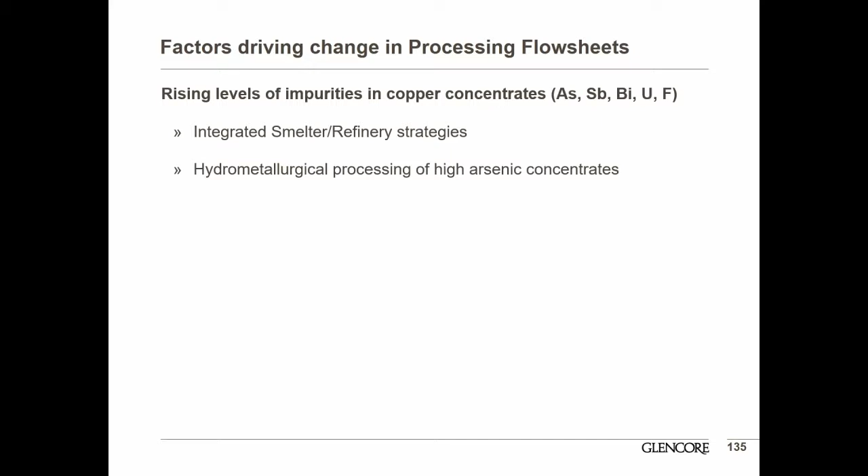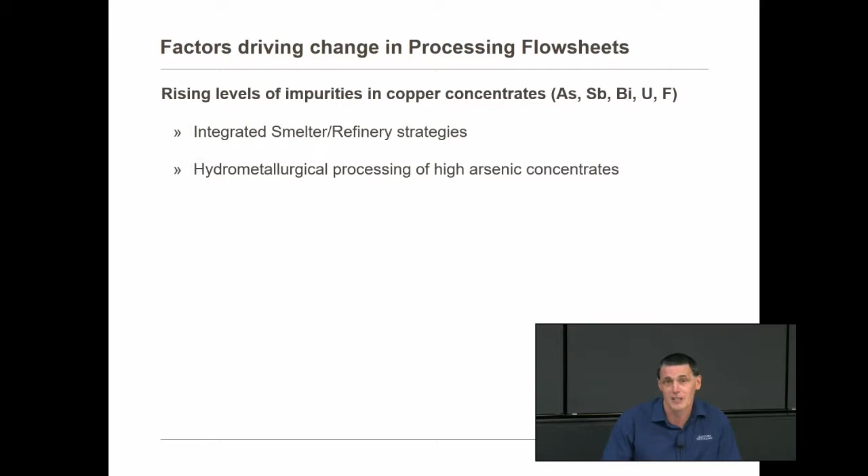I'd like to talk about three different changes tonight that are driving change in our industry. The first is the rising level of impurities in copper concentrates. Arsenic has been an issue for about 10 years now, and we're increasingly seeing issues with antimony, bismuth, fluorine and uranium. Within Glencore and within GT, we're developing a range of products that look at a better integrated smelter and refinery to deal with impurities at the best point in the flow sheet. We've also been developing, over the last 10 years, some exciting hydrometallurgical techniques to deal with some impure concentrates. Paul Boyd spoke about some of those earlier, so I'll just touch on those as well.

The second thing we'll talk about, closely aligned to the first issue, is ongoing global tightening of emission standards. One thing we've seen over the last 10 or 15 years, particularly in countries like China and India, is significant urbanisation and large population growth around what were once isolated processing plants and smelters. That's putting a lot more pressure on the smelting and mining industry in general to reduce emissions. Zero discharge sites are really the best practice these days, and I'd like to talk specifically about SO2 and some of the things we're doing with our technology suite to help reduce SO2 emissions.

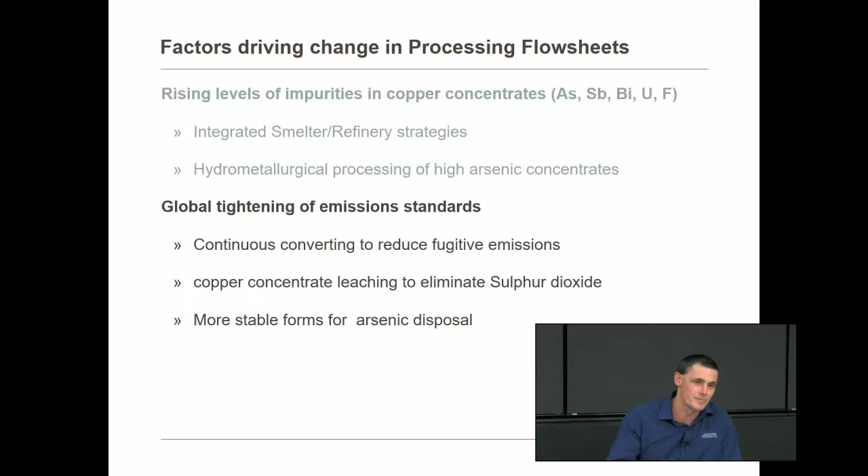The last thing I'll touch on is the global growth of electric vehicles. This has been with us for about 10 or 15 years, but with the significant spikes we've seen in fuel prices in the last 10 years, and also with the drive for decarbonisation across our industries, we think this is something at a clear tipping point, and it's going to have a significant impact on copper and cobalt demand globally going forward.

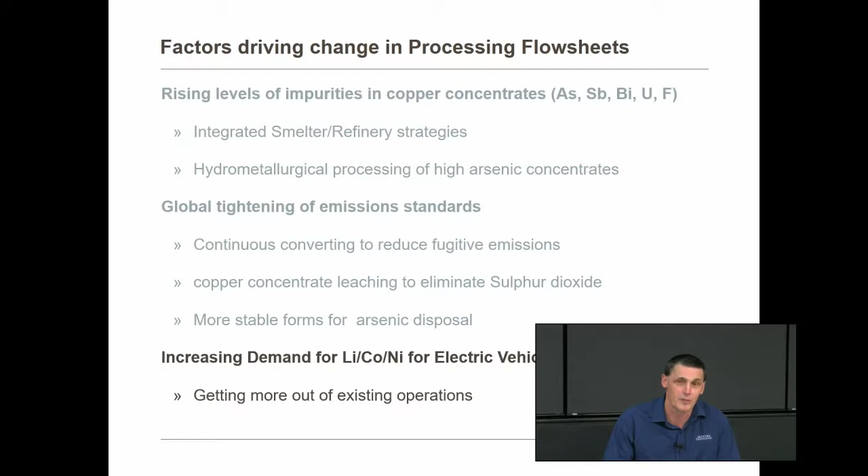So firstly, I'd like to go through rising impurity levels in a bit more detail. We started to see arsenic levels in copper concentrates increase through the 1990s, but at a very slow pace. But around 2004, when the mining boom started in earnest, a lot of very complex ore bodies were brought to market. Between 2004 and around 2007-2008, we saw an increase in arsenic. From 2014 on, that rate of change has increased significantly, and now there's a considerable amount of arsenic produced annually in the world's copper concentrates.

I've got some examples on the screen there. You can see some of the very high levels on recent projects. Ministro Hales in Chile, where they've got a roaster as a solution, has 4% arsenic in that concentrate, which is unsaleable to a smelter. And some of the other examples there, Chuquicamata, one of the world's largest mines, is producing a lot of arsenic in copper concentrate.

Traditionally we've been able to blend that, but the capacity to blend with clean concentrates is really restricted in the market at the moment, and that's a problem that will only get worse going forward. Currently we have 30% of the world's copper concentrates with arsenic levels too high for most of the world's smelters.

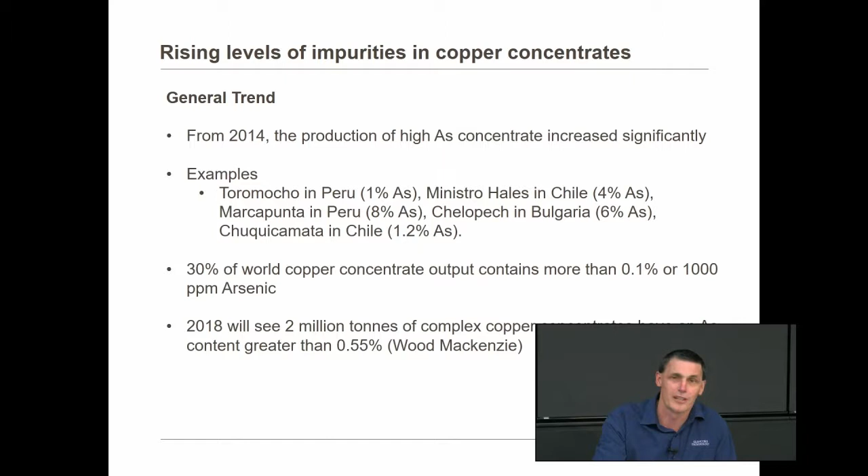Another trend we've seen over the last 10 years is the shutdown of some smelters, such as La Oroya in Peru, that had been able to treat those higher arsenic materials. So we get two trends: the capacity of older and more remote smelters to treat these concentrates is significantly reducing, while arsenic levels are increasing at the same time. Our belief is that we're at a tipping point now where we need significant infrastructure change within our smelter refinery network globally to treat these impurities. That's something we're doing a lot of work on within Glencore Technology to make sure we can meet that demand. The next slide shows the acceleration of arsenic levels in copper concentrates.

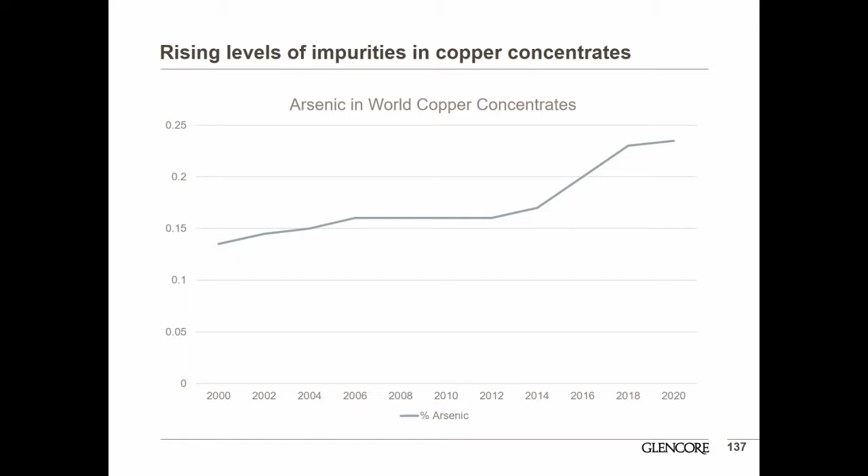You can see the pickup there, particularly in 2012, where a lot of complex projects came on board, and that's continued to accelerate through 2018. The prediction to 2020 is a slight levelling, and again we're starting to see predictions now of a further increase from 2024 onwards. So that's something that's creating a significant challenge for the global industry.

There are many ways that we can deal with this. When we look at the impacts on flow sheets, the first place you would deal with it is in the concentrator, but unfortunately most of the minerals that are bringing high arsenic into our concentrates are things like enargite and tennantite. As far as a concentrator is concerned, these minerals behave very similar to chalcopyrite and chalcocite. They respond the same to the current range of mining chemicals and collectors, and it's very, very difficult to get any kind of separation in a concentrator.

While we have made great strides over the last 20 years with things like the IsaMill, where we can get a significant degree of liberation now, we still don't have the flotation technology and the flotation chemistry to be able to get a clear separation. So unfortunately for the near term, for the next 5 to 7 years at least, a lot of this arsenic will report through to the copper concentrate.

As I said, historically we had been able to blend. There was a significant amount of clean concentrate around in the world. That amount of concentrate is reducing every year as the arsenic levels rise, and so blending is no longer a solution, and we need to start to look to change the infrastructure.

One of the other problems that we've seen is that because we can't take the arsenic out of the concentrate, we have to export it to a smelter, and the smelters are increasingly in urban environments. So what we're doing is we're actually bringing the arsenic problem from a remote mine site, where it may be better contained, to an urban centre where emissions have a much more magnified effect.

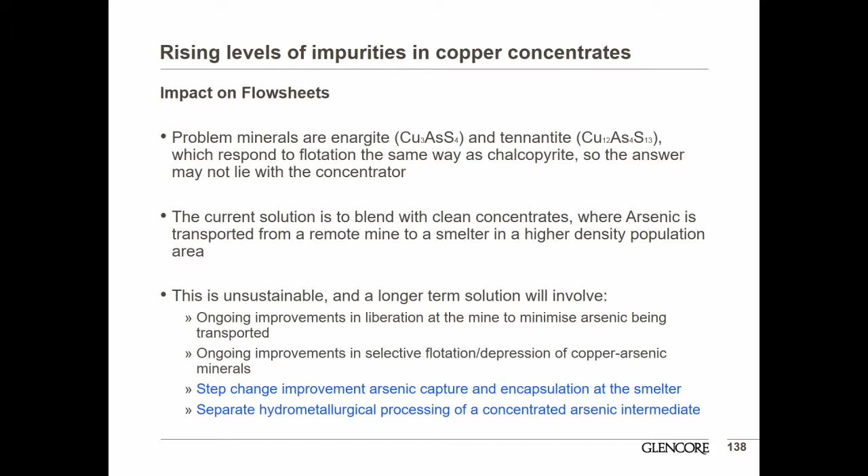So what we're looking to see in the near term then is a step change in the way that we deal with arsenic in our smelter and refinery complexes, and I'd like to touch on that in the next slide with some of the innovations that we're developing within the Glencore Technology Group and within the greater Glencore operations.

One of the things we've focused a lot on in Glencore and in Glencore Technology over the last 10 years is treating arsenic in smelter dust leaching plants. Within the Glencore operations we have 5 plants. Within our own Mount Isa operations here we commissioned a plant in 2004, and that's now had 14 years of operations. These plants are all unique because the dusts that are produced are all unique.

Glencore has a range of smelters that they operate. We operate a flash smelter in the Philippines, we operate an Isasmelt at Mount Isa. We get very different dusts out of both smelters, and so we have a range of flow sheets that we have developed to deal with a range of impurities. We have the ability to custom a solution to a different concentrate blend, and that's something that we get through our unique blend of operations and technology sales.

Our belief is that the world's best practice for arsenic fixation is vitrification in slags, and that's something that we're developing at the moment in conjunction with some of our partners within Glencore, and it's a technology we'll be looking to offer globally in the very near term. The traditional practice of fixing is as ferric arsenate. While it was world's best practice 5 or 6 years ago, increasingly globally it's not an acceptable disposal method anymore, and so we need to look at something that is a lot more stable and a lot more sustainable.

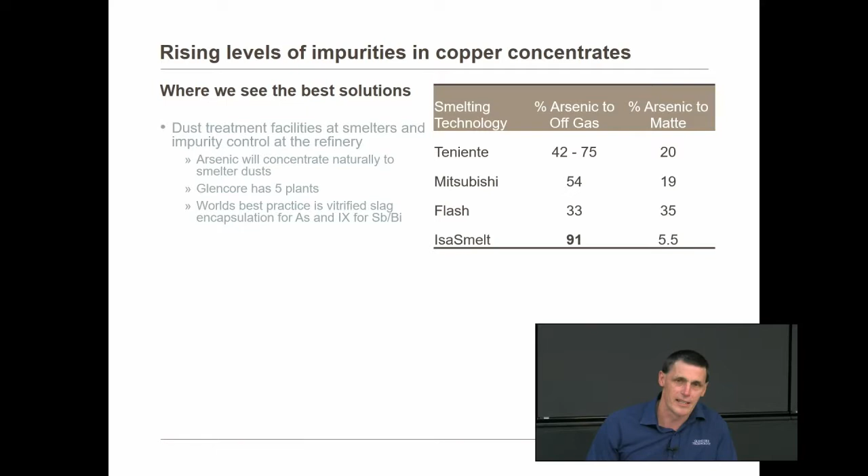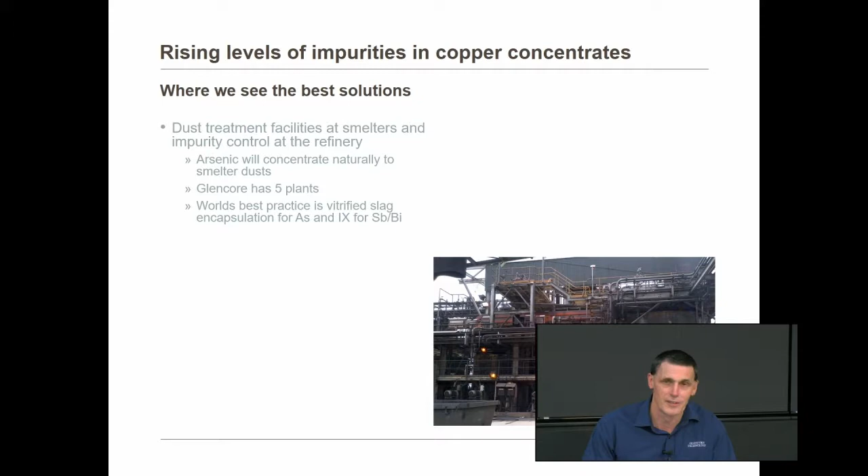We use acid from the weak acid effluent from the acid plant, which also contains arsenic. We use that to leach the dust, and then we fix the dust in that plant there as a ferric arsenate using lime and limestone precipitation. One of the unique things about the flow sheet at Mount Isa is we recover the copper through a metathesis reaction, where we cement it back onto the copper concentrate and feed it back to the smelter. So that's a very, very low cost way of recycling copper to the smelter, and a very effective bleed of arsenic from the dust stream.

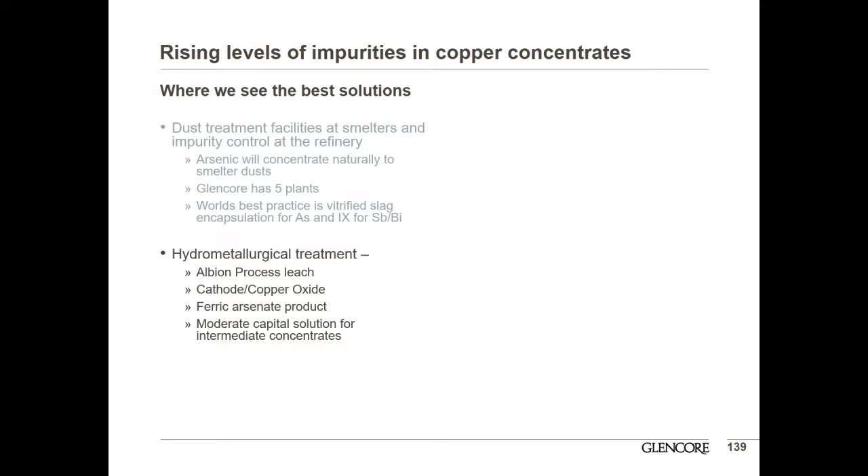Copper hydrometallurgy has been a dream of the industry for a long time. It's one though that's seen 7 or 8 very well publicised starts that haven't been successful. We believe that the combination of a very simple Albion process oxidative leach with conventional SXEW will give the copper industry the hydromet solution that it's finally looking for.

We can get over 99% recovery of copper from copper concentrates and a very effective separation of arsenic. One of the good advantages of the hydromet plants is that you can build them at the mine. You're not exporting an arsenic-rich concentrate to a smelter, and so we get around the problem of concentrating arsenic in urban areas as well.

The other technology that Glencore had developed internally is a sodium sulphide-based leaching process named the Toowong process. That's one that we're currently continuing to look at with a partner, Core Resources. This is a technology where we can actually generate the sodium sulphide in situ within the leaching circuit rather than have to add sodium sulphide from an external source. It's an emerging technology that we think in the next 10 years can have a significant impact in trying to selectively remove arsenic out of copper concentrates as well.

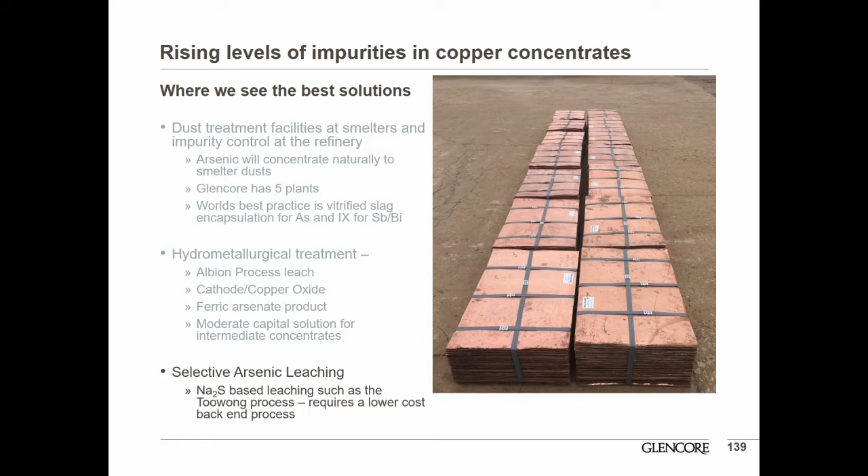I'll move on to the second trend that we see starting to put increasing pressure on the industry, and this is SO2 emissions around smelters. There's been a tightening of SO2 emission levels around smelters. We've seen this particularly in the last 10 years, where financing organisations globally, such as the World Bank, the International Finance Corporation, have every 5 years or so tightened the SO2 restrictions around plants that they're prepared to lend to.

You can see on the slide there the current IFC World Bank guidelines of 20 micrograms per cubic metre over a 10-minute period and 125 micrograms per cubic metre over 24 hours. These are extremely stringent and they require modernisation of a lot of the existing smelter networks around the world, and any new smelting technology needs to have a very inherently safe design, and a design that is able to capture these days over 99.8% of the SO2 that's emitted, and that would be considered world's best practice.

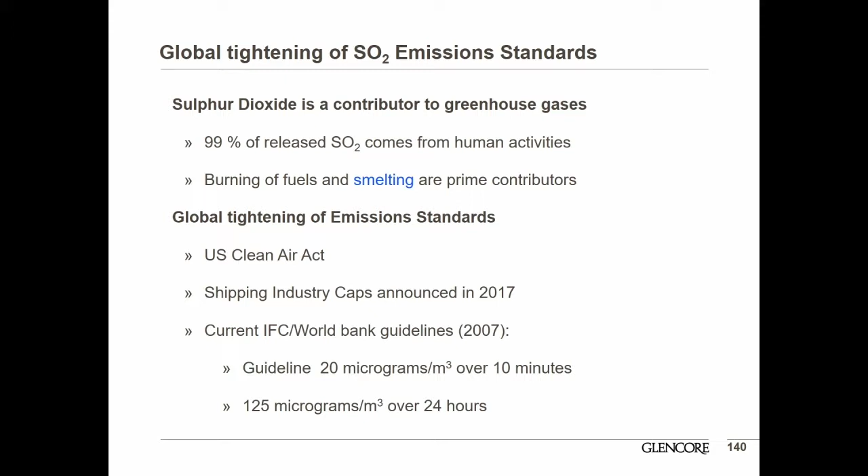Now, the IsaSmelt vessel is a primary smelting vessel, and primary SO2 gas capture is something where the technology is quite advanced. Acid plants are common on smelters. This is a trend we saw beginning in the 1980s really start to gain pace, and most smelters around the world now have a metallurgical acid plant capturing gas from the primary gas streams.

The remaining problem though is fugitive emissions, and these are emissions where you'll get puffing around furnace ports, and these can account for about 5 to 10% of SO2 emissions around smelters. In a modern smelter, less than that, but in a lot of the traditional smelting network globally, you can get that much SO2 loss, and it is as a low-level gas. It's very difficult to capture, very expensive to treat. You can see in the photograph on the bottom right-hand side of the screen, this is a pot movement down a converter aisle, and this is a very common source of fugitive emissions in smelters at the moment.

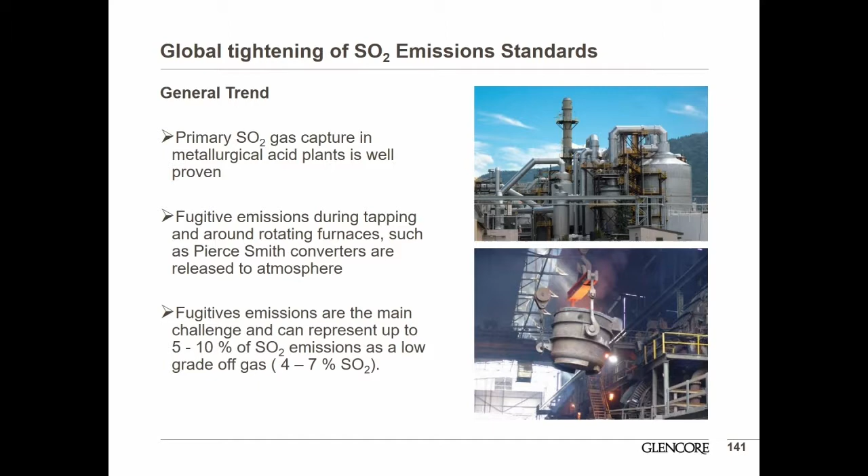The main issue in most copper smelters these days is emissions around the Pierce Smith converters. So Pierce Smith converting accounts for about 80% of converting worldwide. And because the Pierce Smith converter is a rotating furnace, it's extremely difficult to seal around the port of the furnace. While we have seen some very good advances in hood technology and capture technology over the recent decade, it's still not sufficient to be able to capture the SO2 to the levels that we can see financing organisations globally moving to. So there is a need for a new converting technology.

Flash converting has been around for a while, but it is a very expensive technology. It is very complex and not ideal for emerging countries where the workforce and the level of training and skills may not be up to operating such a complex and expensive unit operation. Because we have the TSL furnace that we've developed for IsaSmelt as a very simple, very low-cost unit operation, we've done a lot of work to adapt that for continuous converting, and we have the first of these vessels being constructed at a client site in Africa at the moment, and that will be commissioned later in the year.

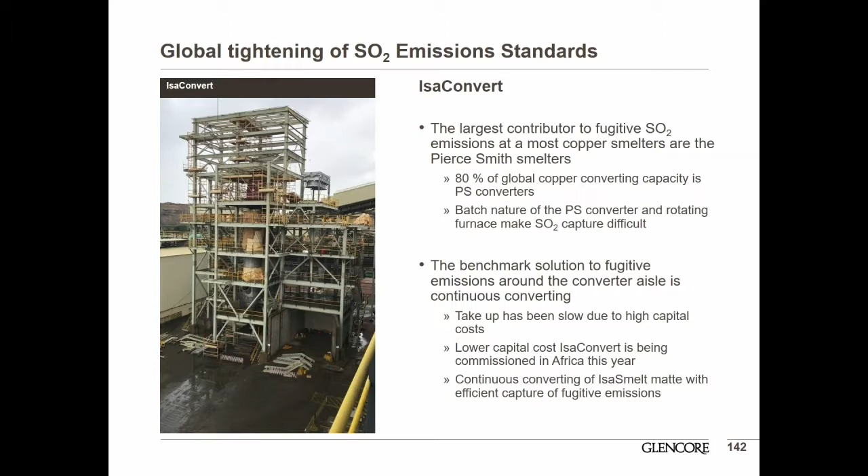The benefit of continuous converting is it's much easier to capture the SO2. You get a very concentrated SO2 stream, which means you can do more with the gas in terms of feeding it through to an acid plant. That's something we see a very bright future for in our technology suite going forward, the IsaConvert technology.

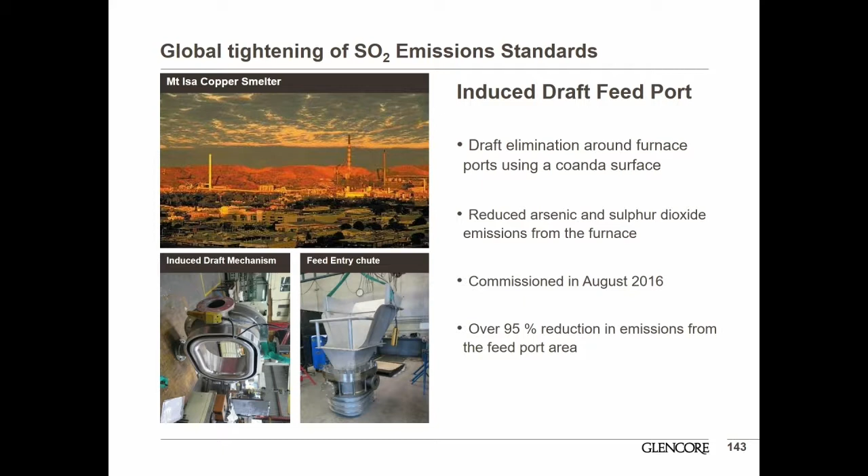This is continuous converting of matte from the IsaSmelt furnace. To complement that technology, we've also been doing a lot of work with fugitive emissions around the feed ports of our TSL furnaces. You can see in this slide an induced draft feed port. This is something we've developed over the last 5 years and commissioned successfully at Mount Isa in 2016. This device uses a Coanda surface to trap gas within the furnace and make sure SO2 is directed to the off-gas system and captured effectively through the ESP system.

It's been a very successful technology. We can use it to seal off around our feed port and our lance port, and this is the next great advance we have for the IsaSmelt and IsaConvert furnaces for improved SO2 capture. It also has the secondary benefit of reducing arsenic emissions through those ports, and moves our technology suite ahead of the curve and into what we believe is world's best practice.

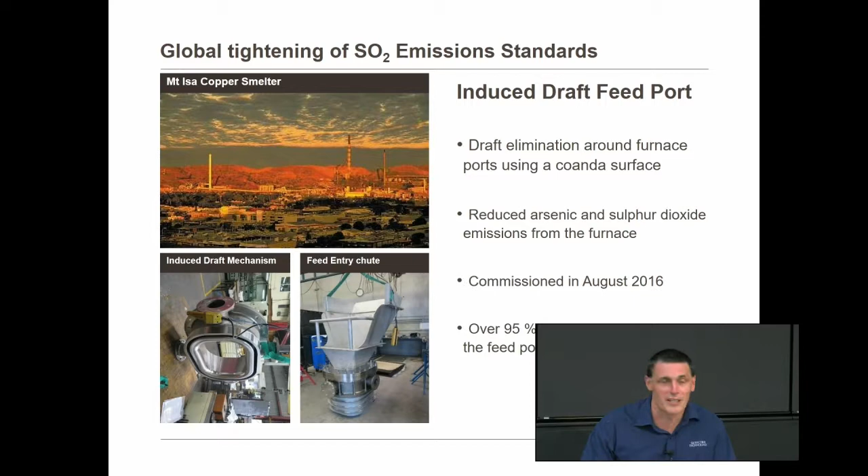The final trend I'd like to touch on is the increasing use of electric vehicles globally. We've seen this emerge in particular in the last 5 years, where we've seen elevated fuel prices and a lot of social pressure on decarbonisation. The automotive manufacturers globally have been slow to respond, but we've seen some disruptive producers emerge, Tesla as a very good example. The amount of electric vehicle batteries produced is increasing exponentially at the moment.

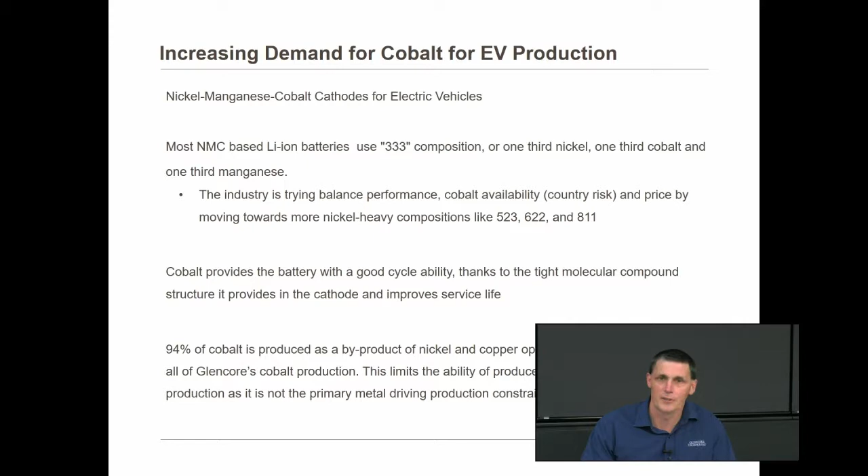Predominantly the major battery used in electric vehicles is a nickel manganese cobalt cathode, lithium ion style battery. One of the keys to these batteries is cobalt, because to get a very deep cycle life you need cobalt. A lot of producers have looked at nickel heavy, cobalt light blends in the last 5 or 6 years, but they haven't been able to consistently deliver the 10 to 30,000 cycles that an electric vehicle battery needs to match the life of a car. You need to expect the batteries to last 10 or 15 years, because that's what you'd expect out of an expensive motor car, and you need cobalt in the battery to achieve that.

What that's led to is a significant spike in cobalt prices globally. That's something we've seen over the last year. We expect that trend to continue in the very near term, and we'd expect it to continue easily over the next decade. One of the reasons we see elevated cobalt prices going forward is cobalt is predominantly produced as a byproduct from the production of nickel and copper.

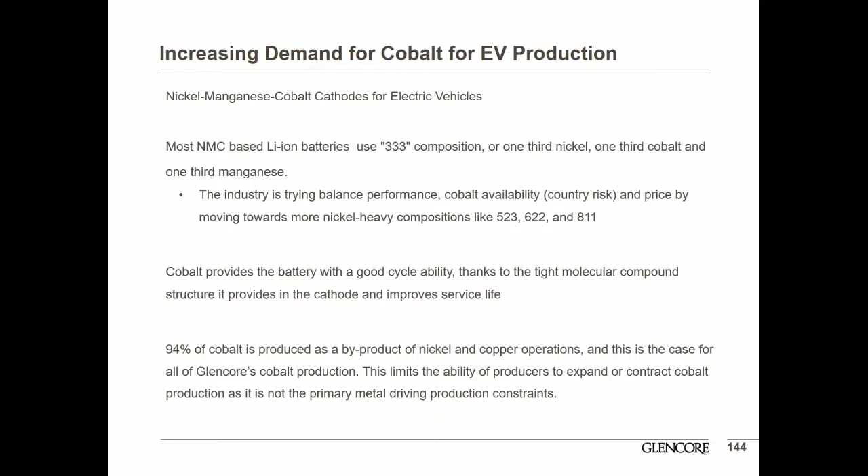There are very few mines globally, and very few slated for future development, that specifically produce cobalt. Because of that, it's very hard for mines to ramp up, and hard for existing producers to increase their cobalt output when their primary output is another metal. That means demand for cobalt will continue to increase, but production levels will stay fairly flat, and we expect fairly flat growth in cobalt production. Because of that, within the Glencore group we're doing a lot to improve recoveries in our operations, and developing a lot of technology around cobalt production, some of which I'll touch on in the next few slides.

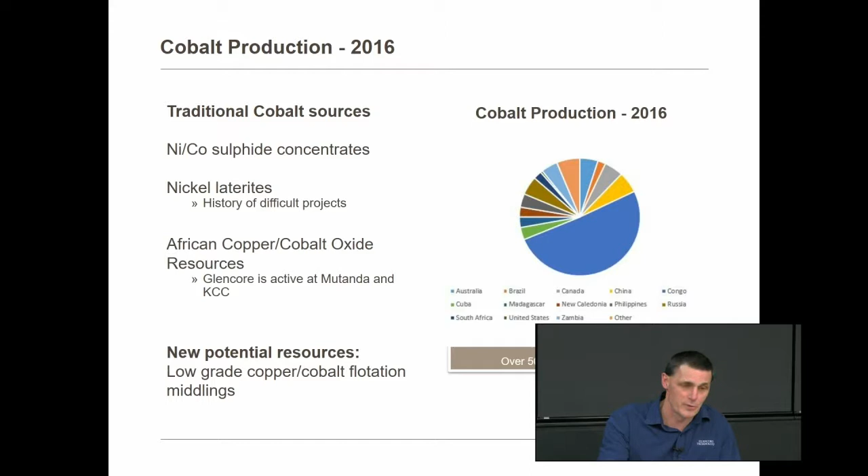The other potential source we see for cobalt production is recovery from low-grade copper-cobalt middlings, and we'll just touch on that towards the end of the presentation.

The next slide summarises some of Glencore's global cobalt production. We produced 27,000 tonnes of cobalt last year. We're planning to produce about 60,000 tonnes towards the end of this year, and that's a significant expansion in our cobalt production.

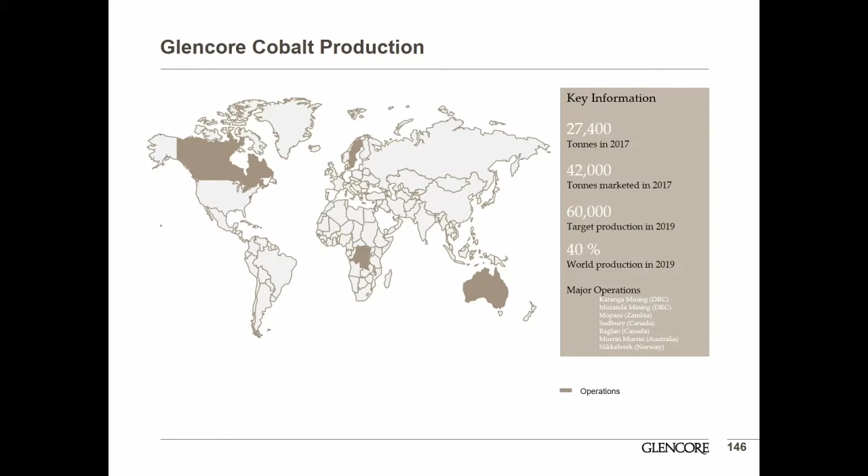There's a list of Glencore's operations, predominantly through our African assets, through some expansions there. We have operations in Canada producing sulfide, nickel laterite operations in West Australia here in Australia, and we have two quite large copper cobalt mines in Africa. So within the group we have experience across a whole range of treatment methods for copper cobalt, ranging from high pressure autoclaves in the laterite treatment through to direct leaching and cobalt oxide, cobalt carbonate precipitation within our African operations. We also run the world's largest cobalt nickel refinery at Nikkelverk in Norway, and we're experienced there with direct cobalt electrowinning as well.

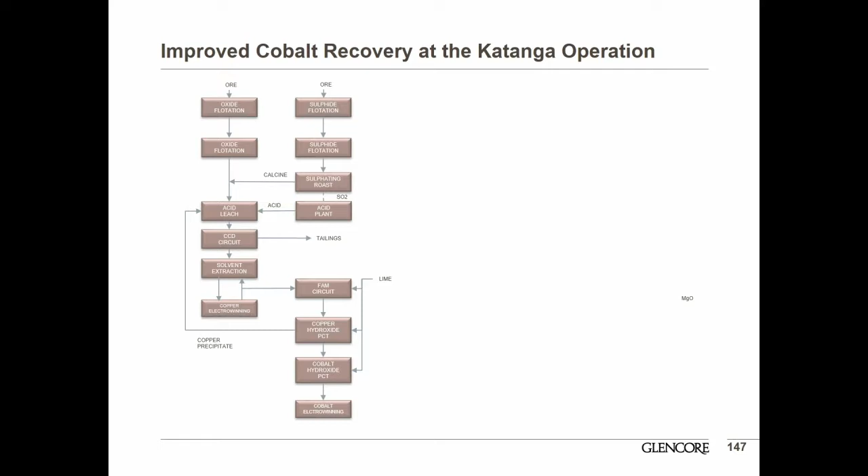I'll speak to one of the operations that we're currently upgrading in the Democratic Republic of the Congo at the moment. This is our Katanga operation. On the left-hand side of the screen you can see the existing flow sheet that we had at Katanga, where we had a combined oxide and sulfide flotation circuit producing copper as SXEW metal and producing cobalt as a cobalt hydroxide product. We're expanding that operation at the moment from about 120 to about 350,000 tonnes of copper, and because of the value of cobalt we're looking to improve cobalt and copper recovery.

For that reason we've removed the oxide flotation step from the circuit and we've converted the plant to a direct leach. So while that has significant operating cost challenges because of all of the mineralogy that goes through the leach circuit, the increased revenue more than compensates for that, and it does simplify the flow sheet. This plant is being commissioned at the moment in the DRC and being ramped up, and we expect it to hit full production sometime in the first quarter of next year.

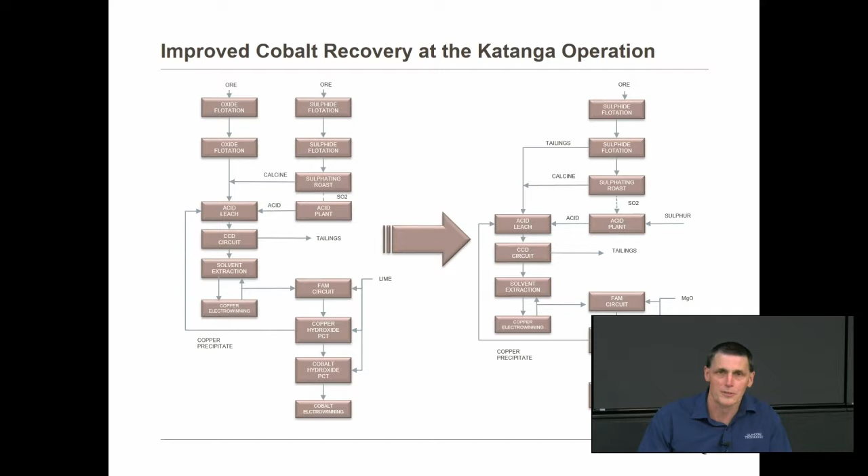At the back end of the flow sheet you can see on the right hand side we produce cobalt as a cobalt hydroxide, and this is done in many operations around the world. Traditionally this is done with a magnesium oxide feed, and magnesium oxide is quite an expensive reagent and leads to quite a high cost production method. Within the Glencore group we've been developing a technology to significantly reduce the costs that I'll cover in the next slide, and this is something we've been testing in several operations recently.

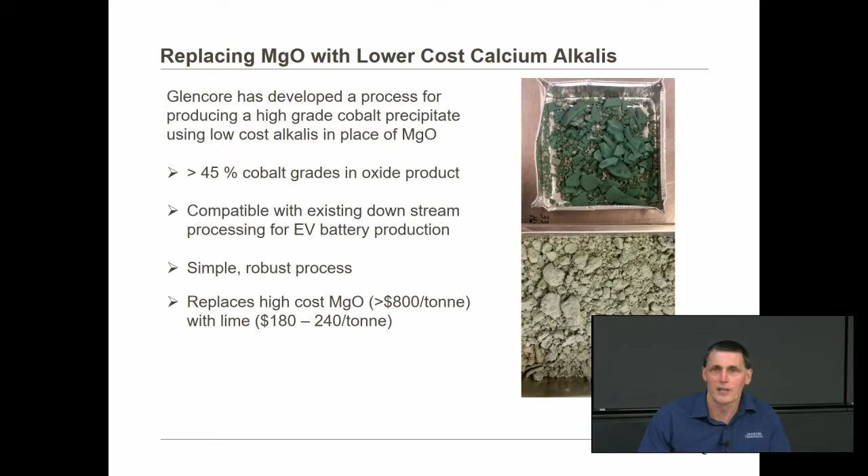What we've found is that we can replace the high-cost magnesium oxide with low-cost lime and part of the neutralisation with limestone. What this gives us is a blend of cobalt oxide, cobalt hydroxide and gypsum. But by controlling the conditions properly and by favouring gypsum growth, we can get quite a significant size difference between the gypsum and the cobalt product. Through simple separation through a cyclone, we can produce a 45 to 50% cobalt product consistent with what will be produced in the magnesium oxide circuit, and separate a gypsum product out at about a third of the cost of operating that circuit.

So this is a significant step forward and one that we've developed specifically within our operations over the last 2 or 3 years, and something that we're quite happy to work with our external clients on.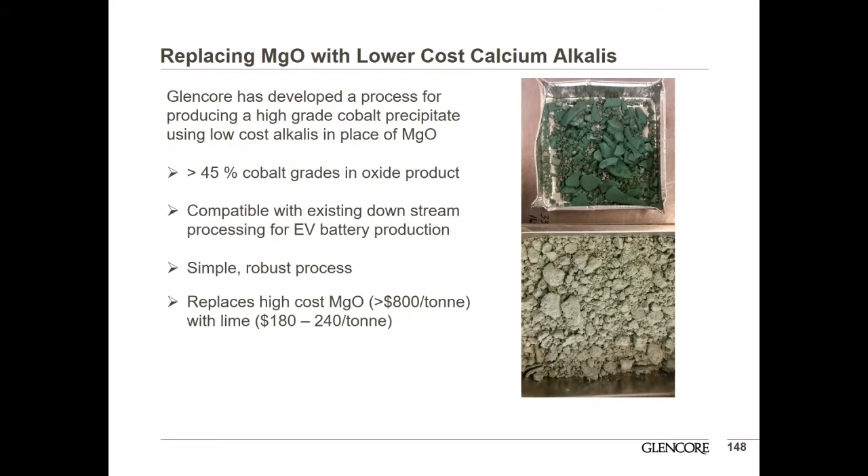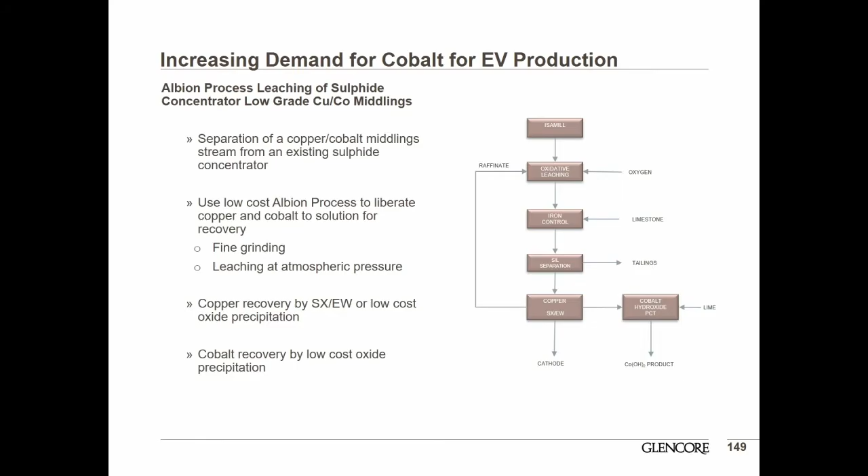The next aspect of improved cobalt recovery that I'll discuss is Albion process. I won't go into this in much detail, Paul spoke to that earlier. But one of the things that we do see is people throw a lot of cobalt away in the form of low-grade copper-cobalt middlings in many flow sheets around the world. Probably 5 or 6 years ago, these materials weren't economic to treat, but with the cobalt price as it is these days, and with the prices that we see going forward, it's very viable now to start to treat these middlings. The Albion process is an ideal circuit because of the low capital cost and the very simple process. It's something that can be retrofitted to an existing concentrator to recover a copper-cobalt bleed stream.

We can treat that easily in the fine grind oxidative leach. And with the high-grade oxide technology I just mentioned, we can use that to now produce a high-grade copper and a high-grade cobalt intermediate in a very low-cost circuit. You do also have the operation of SXEW, or the option of SXEW for copper production, but with the combination of that and oxide precipitation, we now have a very, very low-cost option for exploiting cobalt from middling streams.

So that wraps up the short discussion about some of the emerging trends that we're seeing. We'd be very happy to talk to any of our clients at any time about some challenges that you may have. We have a very innovative group within our Glencore technology team and a great depth of experience there, and we're very proud of our abilities as problem solvers. So please, if anyone has a problem, we would welcome you to contact us, and we'd love to work with you to solve that.